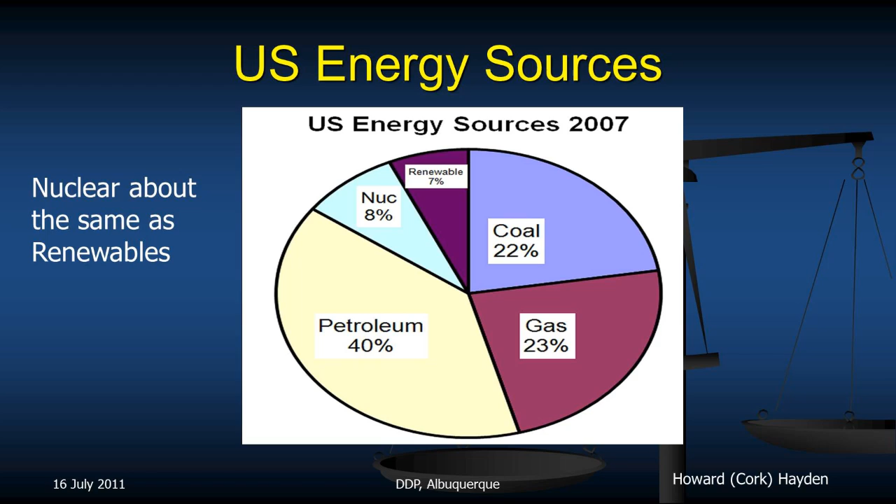This little laser reminds me of what Chris said yesterday. I have a word for you. It's called chromoergic psychosis. Chromoergic psychosis. It is the delusion that energy has a color, particularly green.

All right, here are our energy sources used in the U.S. And what you will notice here is that nuclear provides 8% of our energy. Now, this energy I'm talking about is the total energy used in the U.S., not just for electricity, but for running cars and everything else. Renewable energy is 7%. So you look at those, renewables about as big as nuclear.

And I'm going to use a comment from a book that I wrote that is now out of print called The Solar Fraud, which is that over 90% of our milk comes from cows and bears. Which is true.

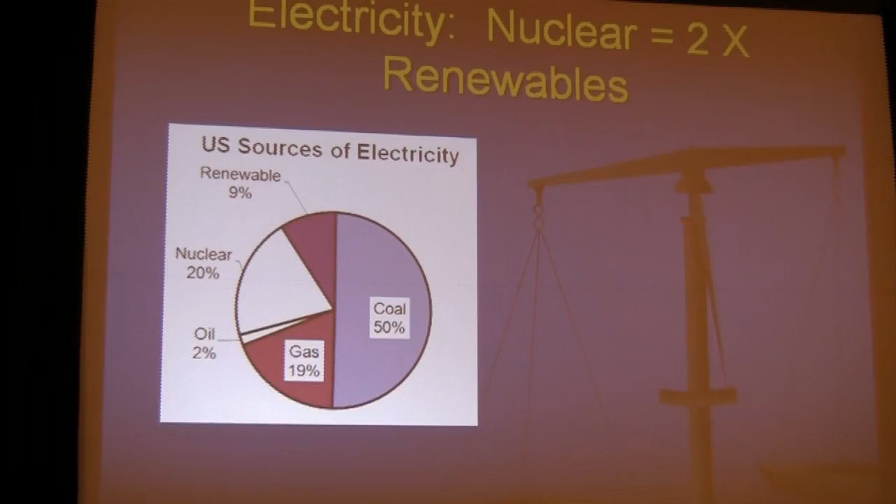So nuclear is about the same as renewables, but if I look at electricity alone, you see that nuclear is about 20% and the renewables are about 9%, so it looks like the nuclear is twice as important as renewables as producers of electricity. But wait, there's more.

If I take the electricity segment and divide it up and see what's there, this part in here is hydro, wood is biomass, bioliquids are biomass, and waste is mostly biomass. And so the upshot of it is, now wind is this fair-haired boy in here, and solar and PV are right there.

The electrical energy in 2009 in units of billion kilowatt hours: wind generated 70.8 out of a total of 3,953. In case you are interested in being able to chase down these numbers, you can get on the internet and go to the Energy Information Administration, EIA, which is the division of the Department of Energy, and they have a book called AER, the Annual Energy Review.

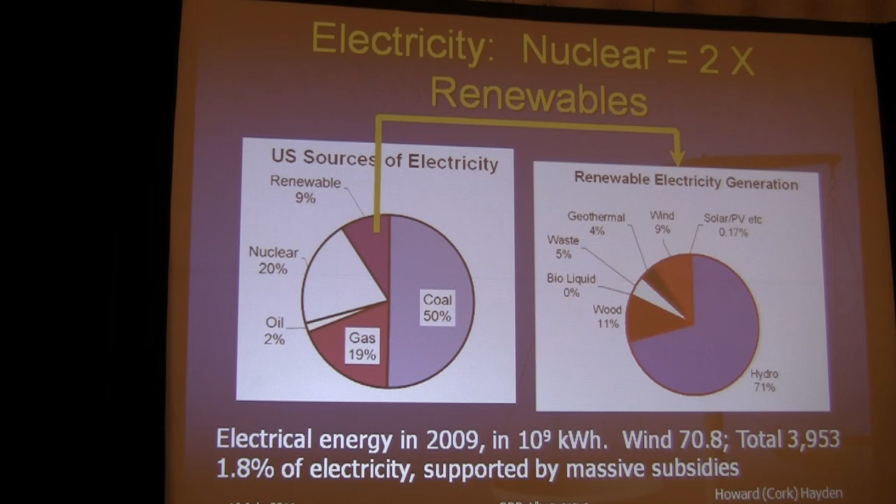And if you look up AER on their website, then you can get year by year a book which, if printed, is about an inch, 25.4 millimeters thick, about this big by about that big, to 12 significant figures. That's where you can find all this information here. So wind and solar will never replace serious energy sources.

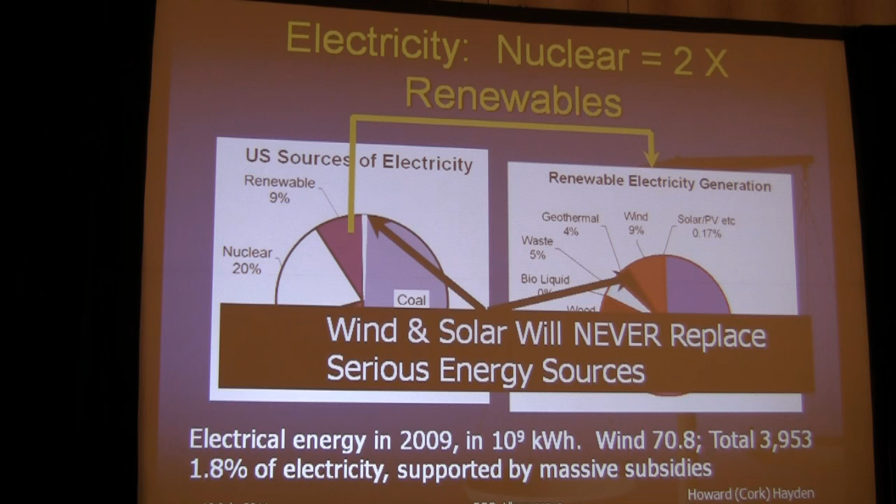I gave a talk some years ago out in San Diego, to a bunch of solar enthusiasts. It was a solar group. I don't know why they invited me. They should have known a little bit better. But a lady introduced it, and she pointed out how solar was abundant and it's everlasting and so forth. I got up to give my talk and said I heard a while ago that solar energy is everlasting. How come it gets dark at night? Believe it or not, they laughed too. But they were pushing, I want to tell you.

Okay, what I'm going to do is talk about the fair-haired boys. Nuclear, in units of billion kilowatt hours, in 2009, nuclear generated 799 billion kilowatt hours, wind generated 70.8, solar and PV together generated 0.8, and most of that is not photovoltaics. The overwhelming majority, like 90% of that energy, has come from the parabolic solar thermal electric units like they have down in the Mojave Desert.

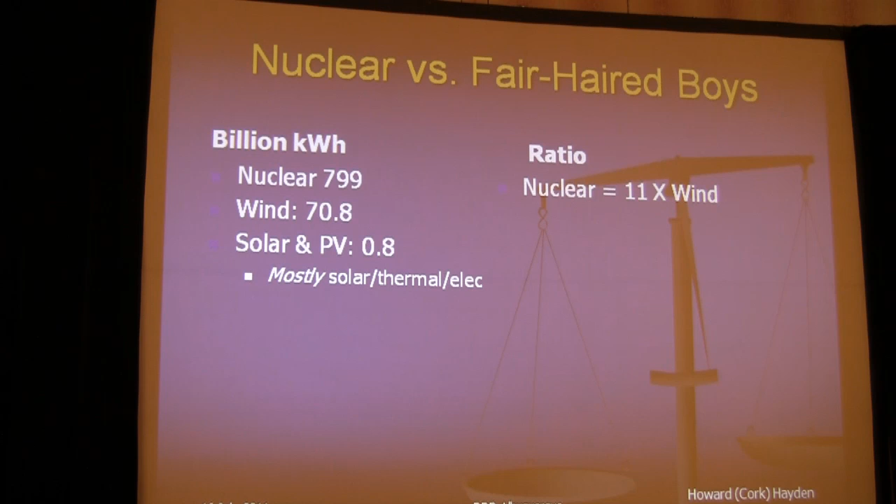In terms of ratio, nuclear produces 11 times as much energy as the wind has, and the wind has been vastly subsidized. And nuclear is 1,000 times the solar and the PV.

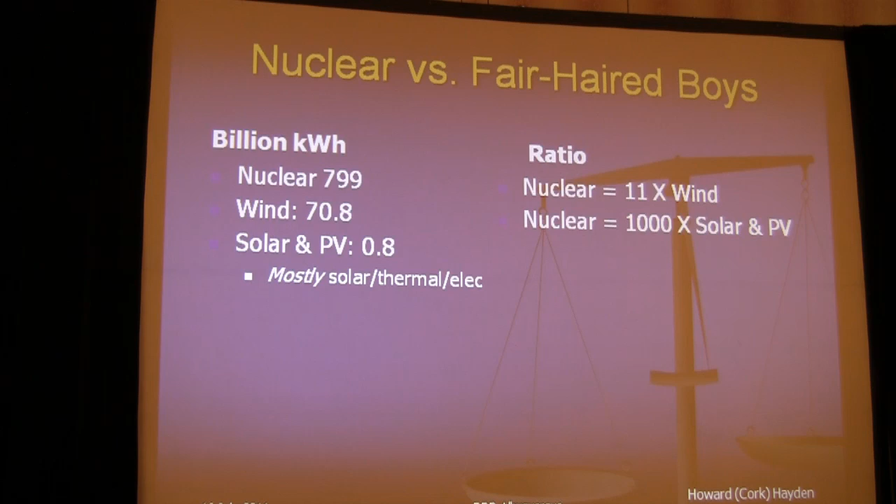Now, the reason that the factor is not up anywhere near 100% is because you're converting heat to work. So the second law of thermodynamics says you're going to have a little bit of trouble with that. But generally it has improved quite a bit, and the reason has entirely to do with the materials that can stand the higher temperatures.

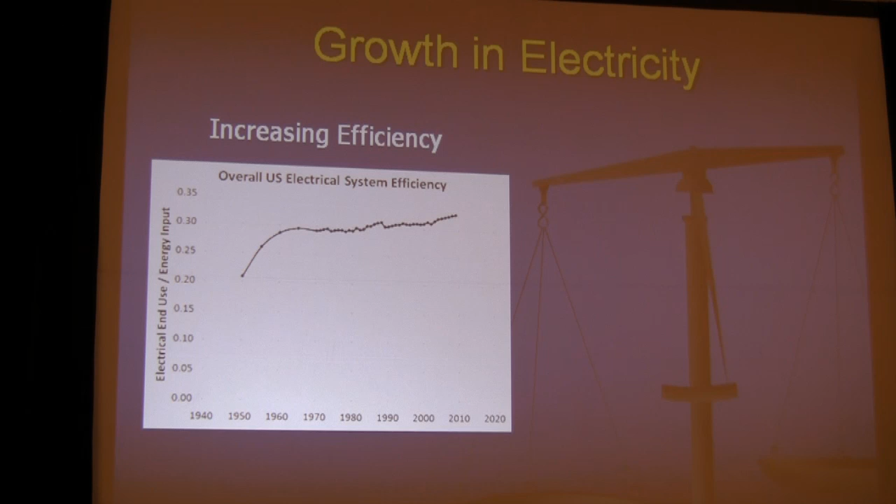We have this plot now since 1950 or so, of the energy input to electrical divided by our total energy use. And what we're doing is by now turning 40% of our raw energy into electricity. So the electrical fraction is growing like crazy.

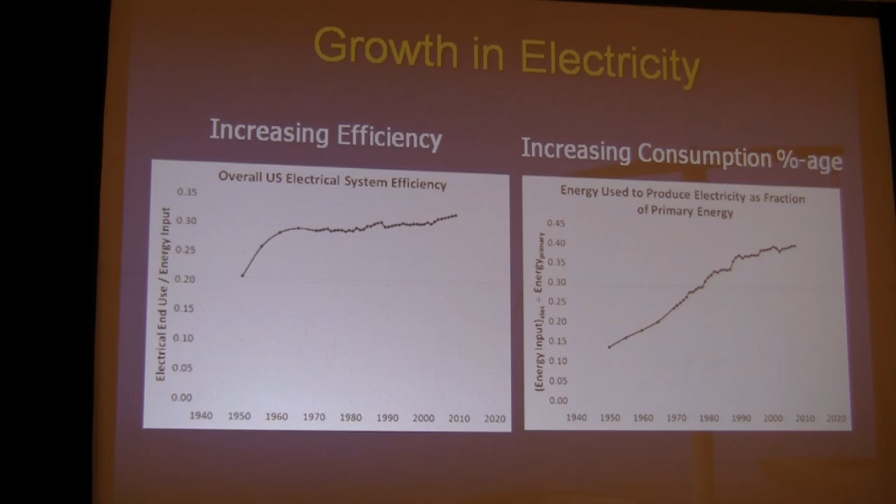Nuclear energy provides a fifth of our electricity. We have 104 reactors at the present time. They have an average capacity factor of about 90%. If you don't know what capacity factor means, it's like this. If you have a reactor that's producing all of its power 90% of the time, or 90% of its power all of the time, or 45% of its power 200% of the time, that's 90%.

We get no transportation energy, approximately, out of nuclear energy. There's not a lot of hope here. I mean, if we had electric cars, but they have to have some pretty good batteries using unobtanium, which is in fairly short supply. We are using electricity to power submarines and aircraft carriers, but that's not a large fraction of our total transportation.

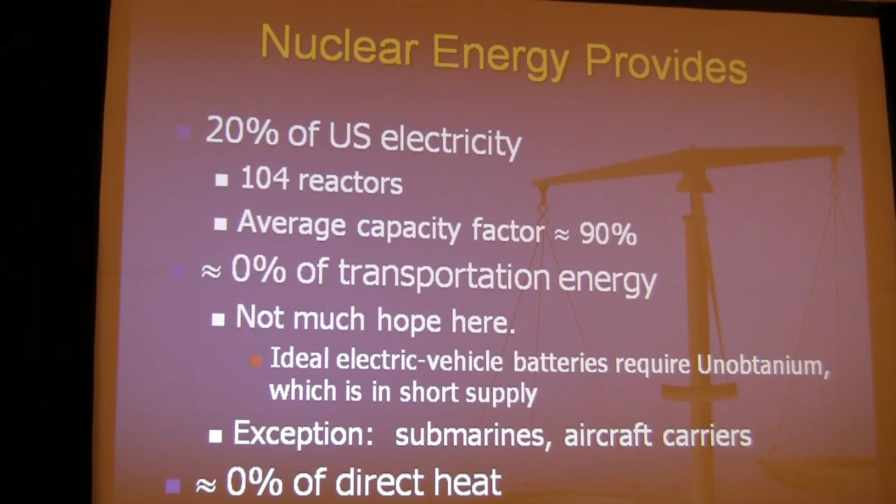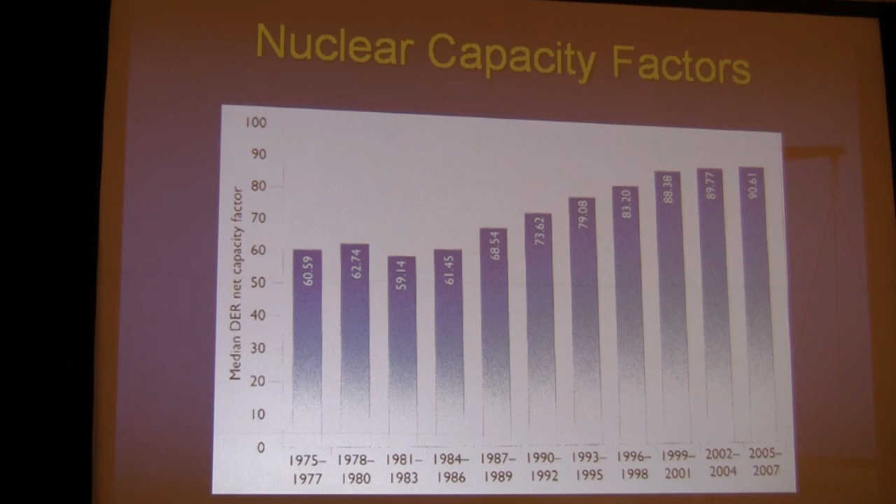We get no direct heat out of nuclear reactors, so they're really pretty good at producing electricity, but for reasons of safety and the length of the power cord, we're not using them for transportation or direct heat. Nuclear capacity factors have grown up from about 60% up to about 90%. Now that's averaged over the whole fleet of 104 reactors.

Wind farms by design have about a 35% capacity factor. In reality, 35% looks awfully good. They don't get that good, but that's the design. You can design the capacity factor of a wind turbine very easily. Let's say you have a child's pinwheel driving a 1 megawatt generator, you're going to have a capacity factor of 0.

If you have a 100-meter diameter fan turning a 1-watt generator, you're always going to have enough power to run that, so you have 100% capacity factor. So it's a question of designing the size of the turbine to the size of the generator that determines the capacity factor. That is, for any given site, it depends on the wind speed.

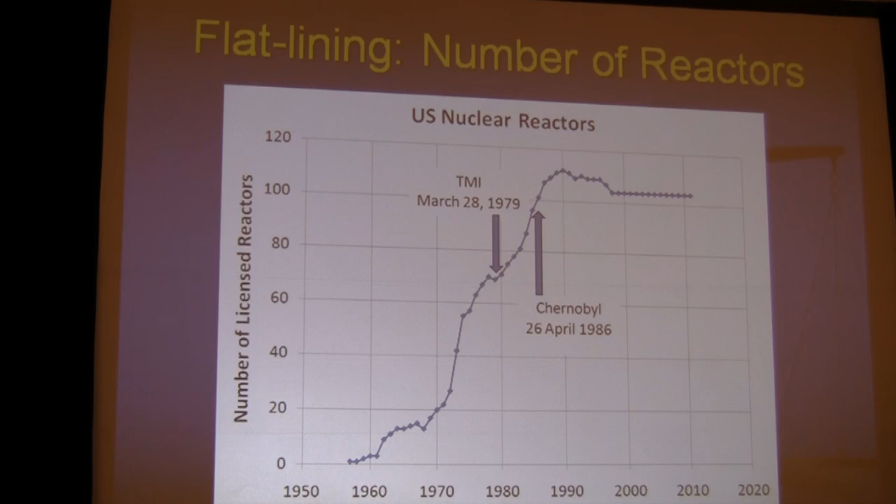Now, there is something for people who say, well, how are we going to decommission them? Well, we have some experience. We've already done that. And of course, there's all kinds of research reactors that have been decommissioned. The electrical production has gone up like this, and it's leveled off at about 800 billion kilowatt hours a year. My mistake, but it's your fault.

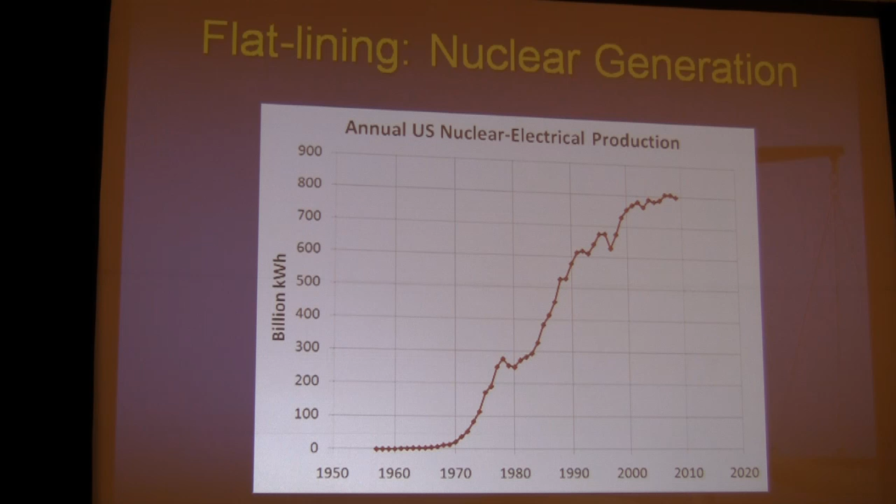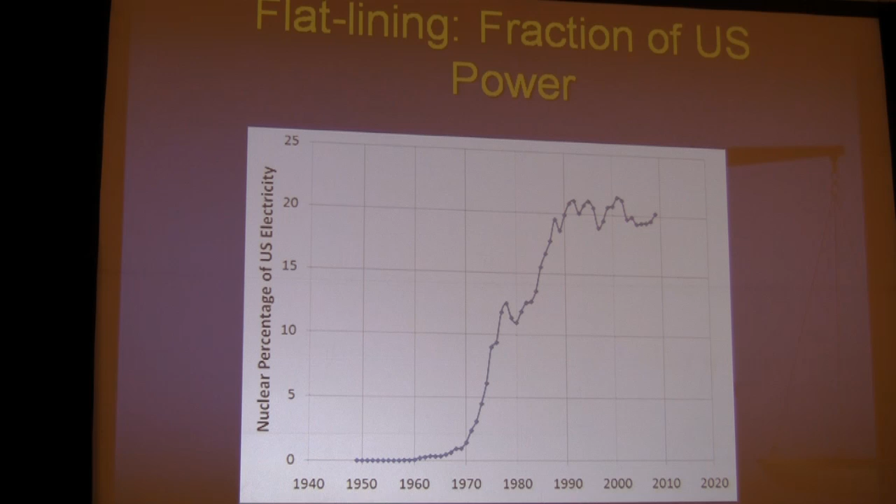As a fraction of U.S. power, it's more or less flatlining. But what's going to happen is that one of these days the economy will improve, the demand for electricity will grow, and we probably won't have more reactors to meet the demand, so that fraction will probably go down.

Nuclear power plants around the world: we have 104 reactors and 0 under construction. We have one that they're trying to revive the license for or something like that. They were going to build one in Texas. That was a Toshiba GE project, and they have decided evidently to can that for the time being.

Russia has 32 reactors going and 11 under construction. That means for every 3 operating, they've got 1 under construction. Worldwide, 438 operating, 65 under construction, so that's about 1 in 6. We have 0 out of 104.

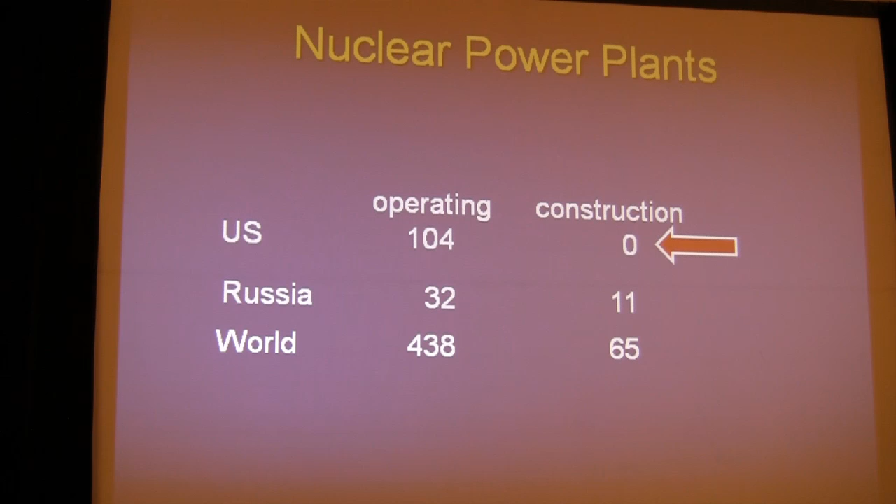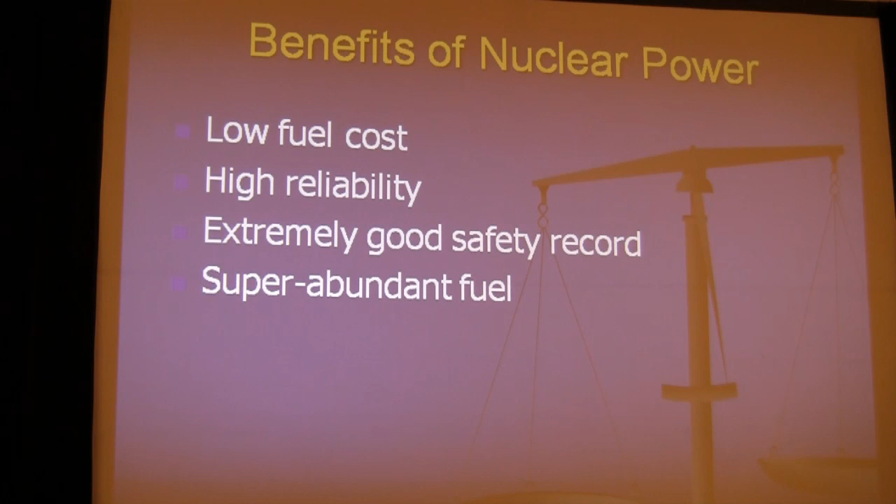Okay, benefits of nuclear power. You got low-cost fuel, high reliability, extremely good safety record, super abundant fuel. Those are pretty good arguments. So how come we're flatlining? Why aren't we building more reactors? It's not the technology and it's not fuel shortages.

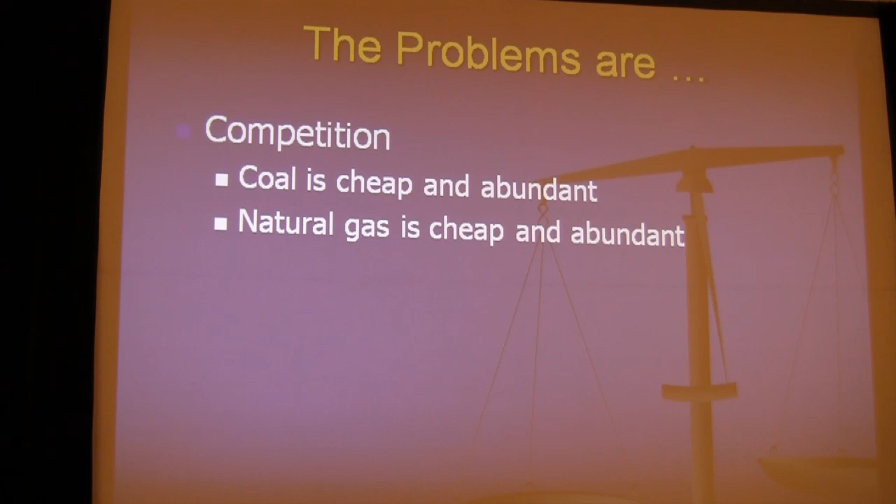One problem is competition, and that is that coal is cheap and abundant, natural gas is cheap and abundant. Both are more dangerous than nuclear by a considerable amount. But people don't think of the danger involved. They just think, my God, nuclear is very bad.

Fuel-fed plants are fairly rapidly built, and they're a lot cheaper to build than nukes. It's one of these things where you have a trade-off between initial cost and continuing costs. I remember when I was at the University of Connecticut, they had built the physics building, and in order to save money, they put in single-pane windows because, see, the building budget was one thing, and the maintenance and fuel and heating budget was quite another.

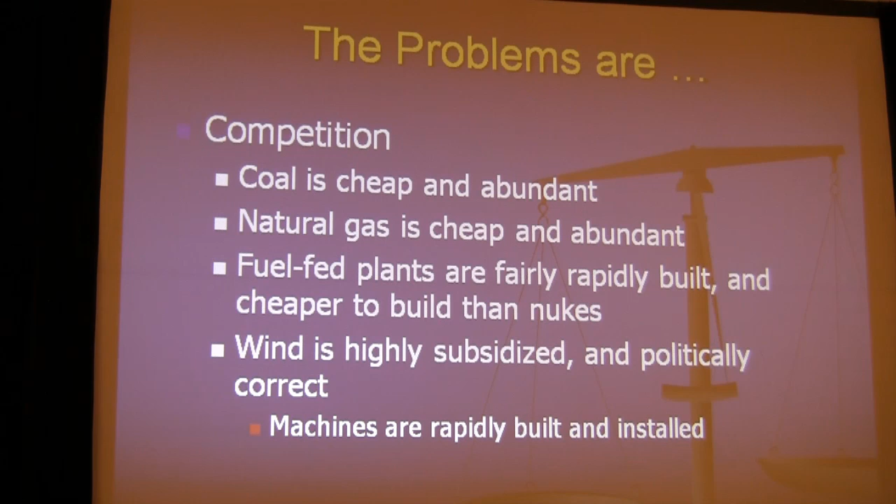So they went cheap on it. Wasn't too smart. Wind is highly subsidized and politically correct, and the machines are fairly rapid to build. You're only building 1 megawatt or 2 megawatt electrical generators and so forth, and you've got factories turning out blades. Pueblo has a factory turning out the towers for the Vestas units, which I think is really kind of bad. One of these days that wind thing will blow over and those talented people will be out of a job.

A lot of competition is coming from the gas combined cycle unit. Now, I don't know if you know how these things work, but you have a gas turbine running an electrical generator. Now, that gas turbine is not appreciably different from the one that flew you here. Well, I've actually got a piston engine that brought me here,

but anyway, what they have done is they have used gas turbines with very, very high temperature resistant materials. Sometimes they make the blades out of single crystal titanium, and sometimes they make them out of some sort of steel with a ceramic coating and so forth. But they can take very high temperatures. The exhaust comes out at high temperature. Now, in some cases, they will add in some natural gas reheat, but then this heat is used to boil water to run a steam turbine.

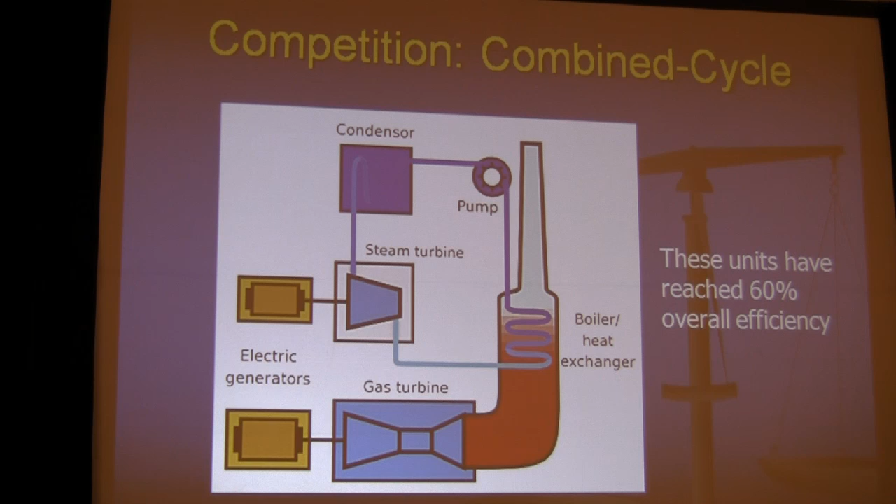So it's a combined cycle, so you have a generator here and a generator here, and they have actually reached overall something like 60% efficiency. So that means you're squeezing a lot more electricity out of your natural gas than you were able to get before. The huge problem against nuclear has, Jay, are you here? Fear.

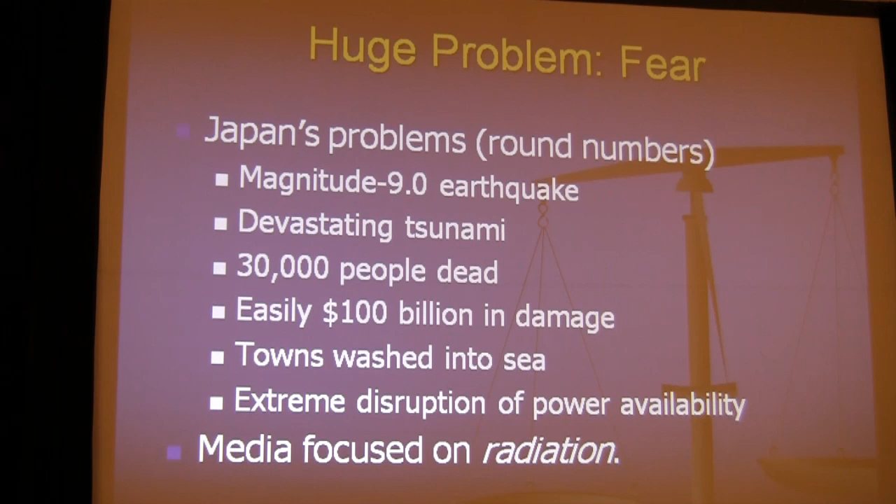So here we have Japan's problems in round numbers. They had a magnitude 9 earthquake. They had a devastating tsunami. I think it was 30,000 people now considered dead. I don't know if that's the exact number, but whatever it is, a great large number. They've had at least $100 billion in damage. They've had towns washed into the sea. And they've had an extreme disruption of the power availability, which has cut down the ability to manufacture parts for automobiles and things like that. So what did the media focus on? Radiation. All right.

Probably most of you are not into making horror films, but if you make a horror film, the thing that is most horrible and frightening is the monster that's skulking around in the dark and you can barely see him. Because if they bring the monster out where you can see it, that's pretty natural. Well, there's a problem. You see, you can't see radiation. And that is one of the very frightening things to a lot of people. It's dangerous and they can't see it.

And Fukushima Daiichi has released radioiodine. Take potassium iodide pills. Unfortunately, Bobby has stolen my thunder. Isn't potassium-40 radioactive? I mean, this was also silly because there was so very little iodine-131 that would arrive in the U.S., and to take on the other hazard of potassium iodide pills. It isn't, mind you, the radioactivity in the potassium iodide pills. It's the potassium iodide that is not particularly safe for you.

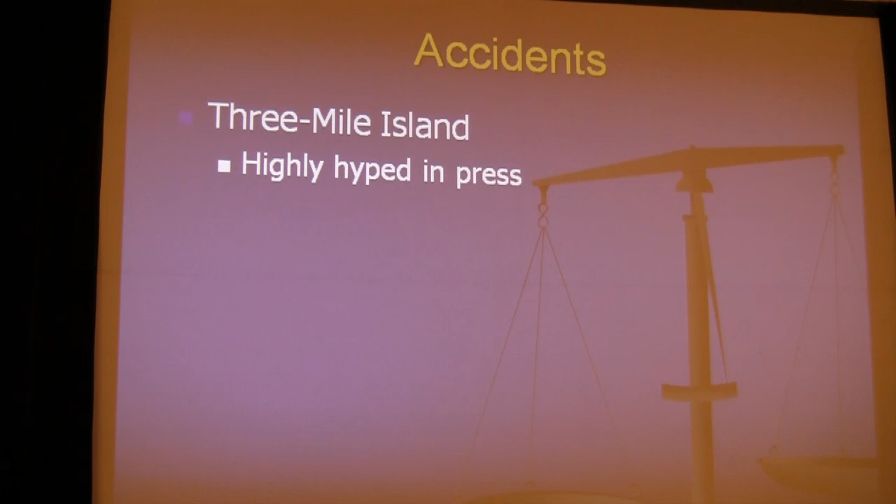Okay, there have been some accidents. Three Mile Island, which was highly hyped in the press, nobody got hurt. Chernobyl, and most of the core was released in a graphite fire. Fukushima Daiichi and Daini.

Dai means number, and ichi means 1. Dai-ni, that's number 1, number 2. Ichi, Ni, San, Sayonara. You've used up my entire Japanese vocabulary.

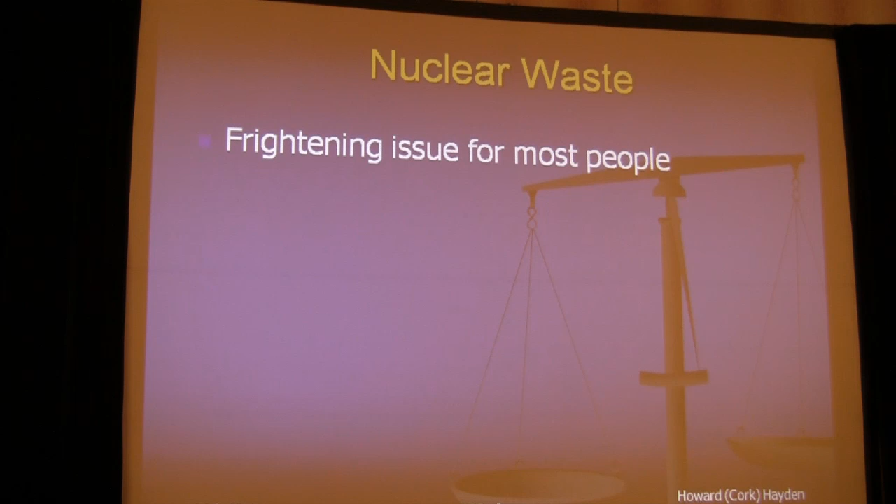But tsunami, okay. There's a radiation release from there too. Towns were evacuated. Now, another reason for fear is nuclear waste, and it's a frightening issue for a lot of people. Yeah, but what do you do with the waste? You know, as if no one had ever thought of that. Engineers aren't very smart, I guess, right?

Some take-home messages for you to understand. A gigawatt year, that means if you have a power plant producing 1 billion watts of electricity around the clock for a year. Now that's enough to do everything that's used in a town of 700,000 people. You generate 1 metric ton of actual waste. You got any idea how big a metric ton is? It would easily fit under this table. Well, it would fit under about in here. It's less than a cubic meter because a cubic meter of water has a weight of a metric ton. And this is denser than that.

The same electricity from coal uses 1 billion pounds of coal. A figure for you to remember is that in a good power plant, 1 pound of coal produces 1 kilowatt hour of electricity. Another thing to remember is that the activity, number of radioactive events per second, is inversely proportional to the half-life. The longer the half-life, the lower the activity. Okay, the higher the activity, the less long the stuff lasts.

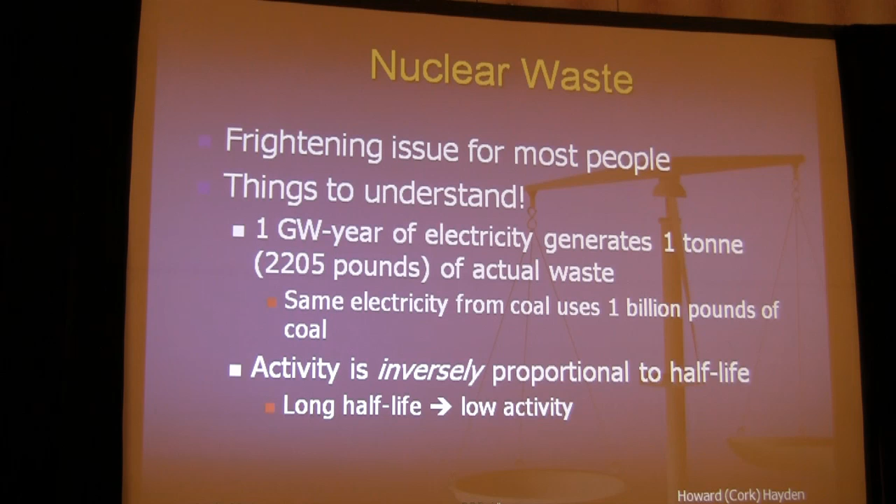And that means if it has a half-life of 1 minute, you don't worry about it at all because that radiation isn't going to get to you. If it has a half-life of millions of years, well, it's not very radioactive. The bad stuff is the stuff that has a radioactive half-life of around 30, 50 years, something like that. There's 2 of those.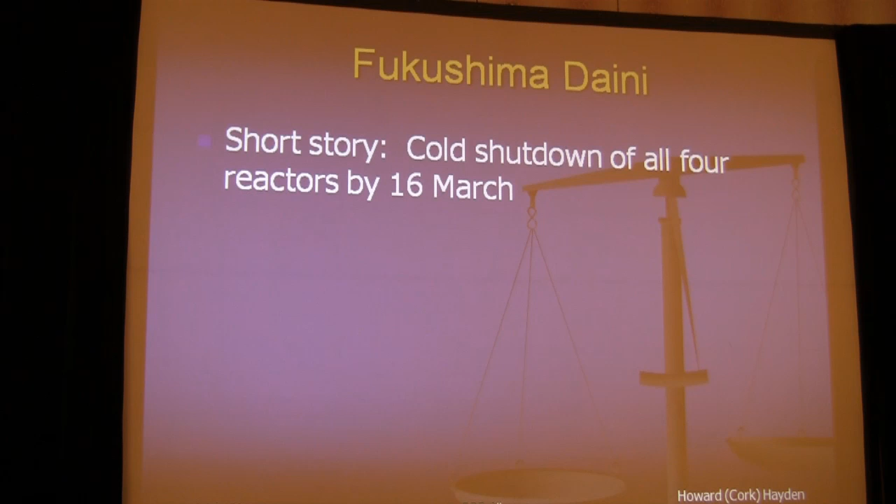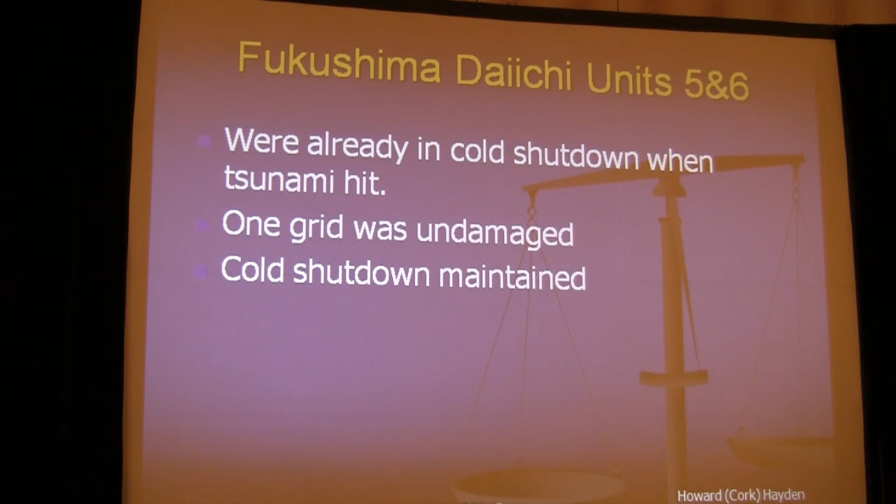I'm going to talk about Daini first. The short story is they had a cold shutdown for all reactors on March 16th. One of the incoming grids was undamaged, so they were able to get all the power they needed to go through the cold shutdown, and they have maintained it ever since. Now, Daini is south of Daiichi, and they were maybe a little bit higher in elevation. Anyway, the tsunami was not as bad there.

And here are some lessons that might have been learned. You always wonder if things have, in fact, been learned - if you've taught a course, you wonder if anybody learned anything.

Before we get on with this, here's an interesting question. Do you know what profession exposes its workers to the highest levels of radiation? International airlines. A lot of people get that. What exposes you to the least? Nuclear submarines, yes. These guys are under the water for a long time in a low radiation environment, and Bobby, that might be the group you want to study. They're shielded from everything except the reactor, and if Ted Rockwell were here, he'd tell you about how much radiation they actually get, but it isn't much.

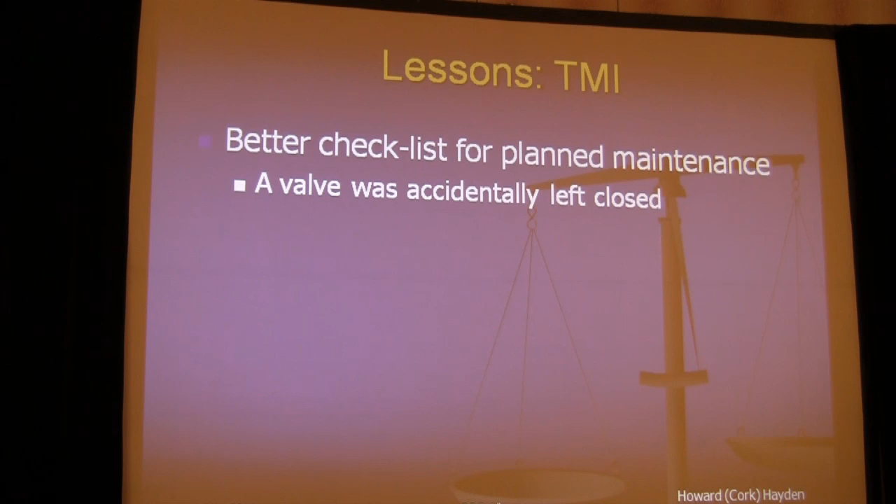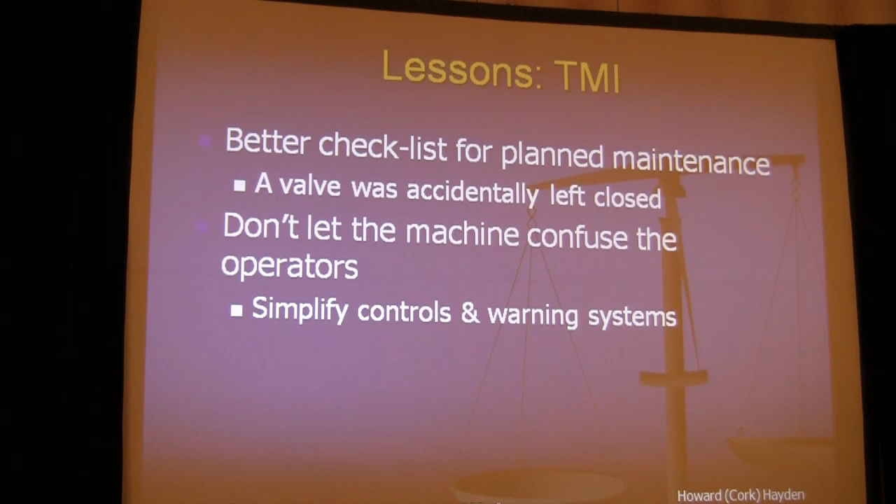Anyway, for TMI, they needed a better checklist. When you flew here, your pilot had a checklist, and he went through various things to make sure your plane was ready to fly. But at TMI, they left a valve accidentally closed, and then things went bad - bing, bang, noise, klaxons, and everything else. They didn't know what to do because there was just noise all over the place, and they had contradictory information to deal with. But no one was hurt from it.

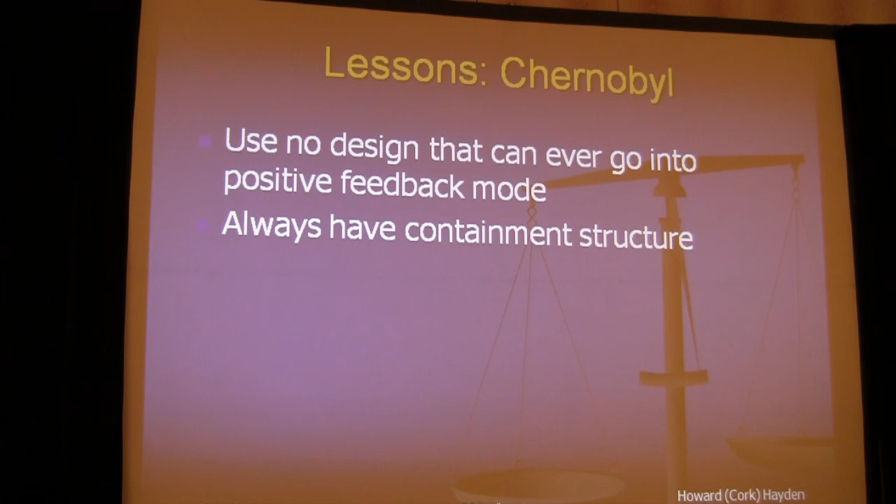Chernobyl was a different thing. They used a design that had been rejected in the US many, many years ago, back in the 50s. But as Petr Beckmann said, the Russians thought it was easier to make more Russians than all that concrete. They didn't have a containment structure, and the operators were playing around. They got into this positive feedback mode, and it went from 0.01% of full power up to 200% of full power in a matter of something like seconds. It went like gangbusters - exponential growth on steroids.

And they weren't honest with the public, and that was a place where potassium iodide would have done a lot of good. And it's important to understand - people talk about Chernobyl as a horrible thing, and it was a horrible thing, but it was about as close as you can get to the worst possible accident.

I remember back in the old days, you'd talk to people - well, what's the worst thing that can happen in a nuclear reactor? And I'd turn around and say, well, what's the worst you can imagine for an airplane accident? And they'd say, well, you got a big plane load of people that crashes in the Mojave Desert and kills everybody. No - how about two such planes colliding over New York? One falls into Shea Stadium where people are watching a baseball game and incinerates all those people. The other falls into Yankee Stadium and incinerates those people.

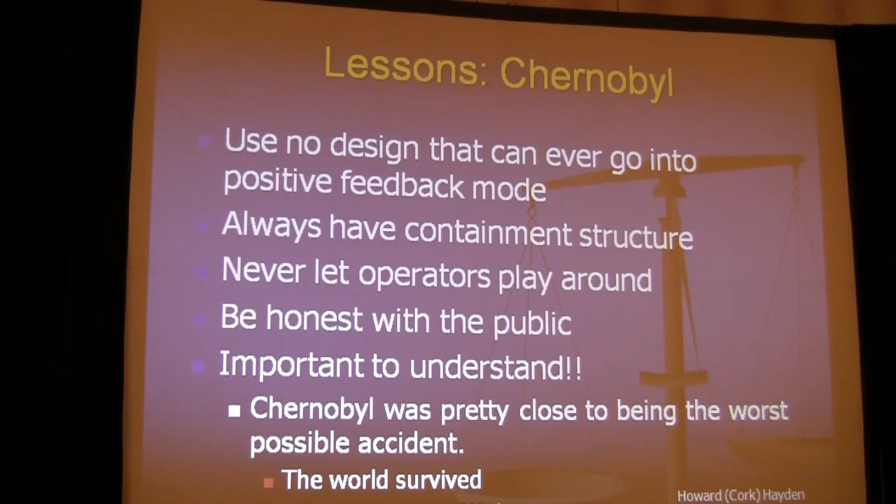So we have some lessons from Fukushima, and this is the first lesson. You see that thing right there? Anybody here read Chinese? It's about like trying to read a gravestone, or the Japanese - like trying to read an ancient gravestone. You have to go up there and do rubbings on it or something like that. But these tsunami stones tell you: don't build below this level, because the tsunami has reached there.

This was an article in the New York Times, 21 April. It warns residents not to build homes below it. Hundreds of these tsunami stones, some more than six centuries old, dot the coast of Japan. So the lesson is, listen to your mama.

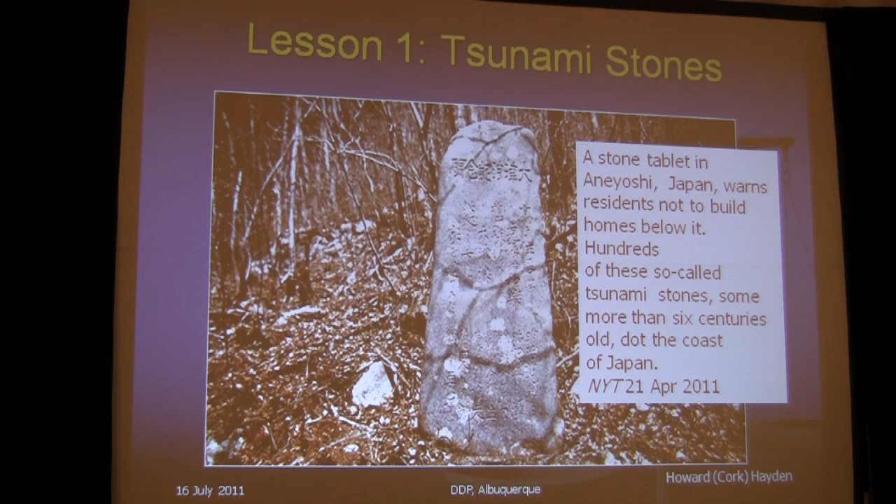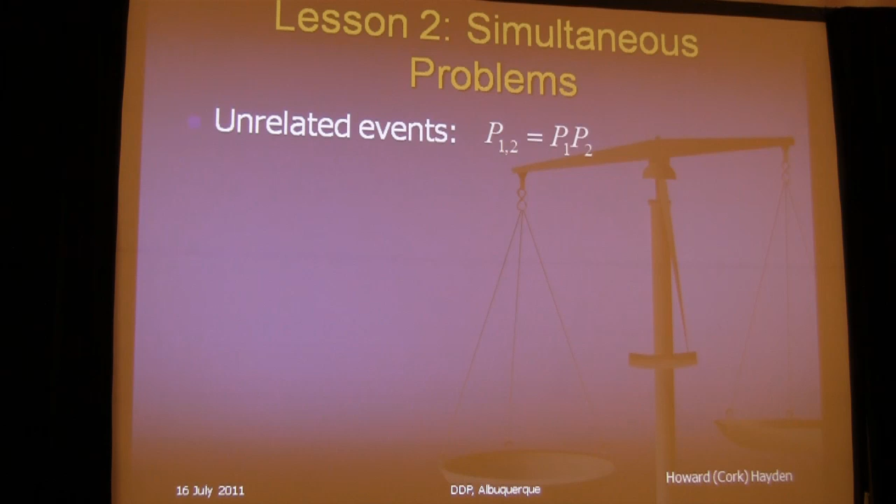Another lesson is easily understood. If you have unrelated events, the probability of one thing going bad and a second thing going bad at the same time equals the product of their probabilities. So if each event has one chance in 1,000 per year, there's one chance in 1,000,000 they occur simultaneously. But if the events are related, so that A causes B and C, then the probability that they both occur is about equal to the probability that either one occurs. And one chance in 1,000,000 is a whole lot different from one chance in 1,000.

But all of these problems, with the possible exception of one I'll discuss later, came from the lack of power. If they had had power, there'd be no problem.

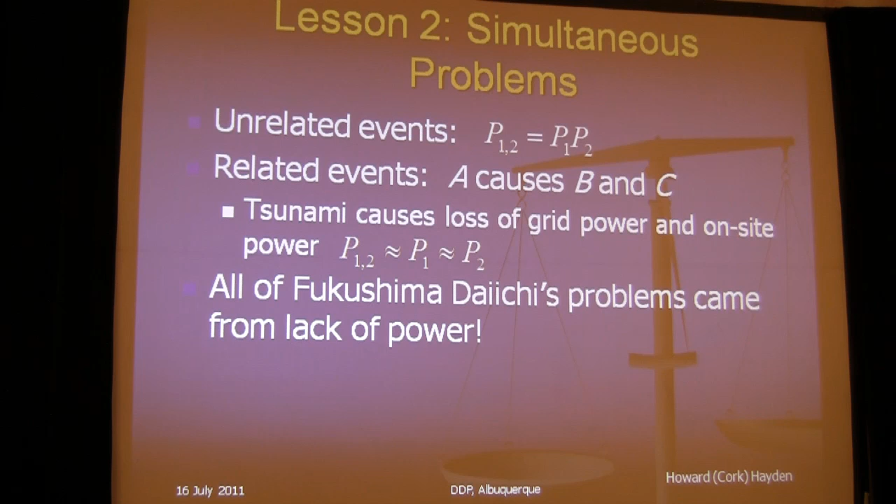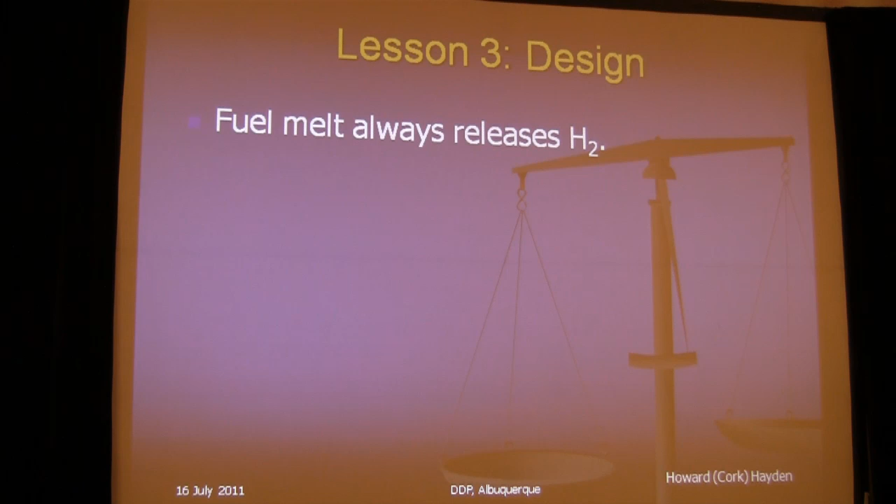The design: a fuel melt always releases hydrogen. If it gets hot enough, the zirconium cladding burns in the water atmosphere, producing hydrogen. You get zirconium oxide or dioxide, and it releases hydrogen. And the hydrogen has to be able to vent without any possibility of explosion.

Millstone Unit 1 was a boiling water reactor, and they had a hydrogen explosion. They had a big pipe going out and a big chimney to vent radioactive gases, but some hydrogen got in there from something that happened, and it blew a door off. Blowing a door off is a whole lot different from what they had there, but that's what happens when you have hydrogen. Hydrogen has the largest range of flammability of all fuels, anywhere between 4% and 75% in air, and it'll burn. So it's not at all like gasoline.

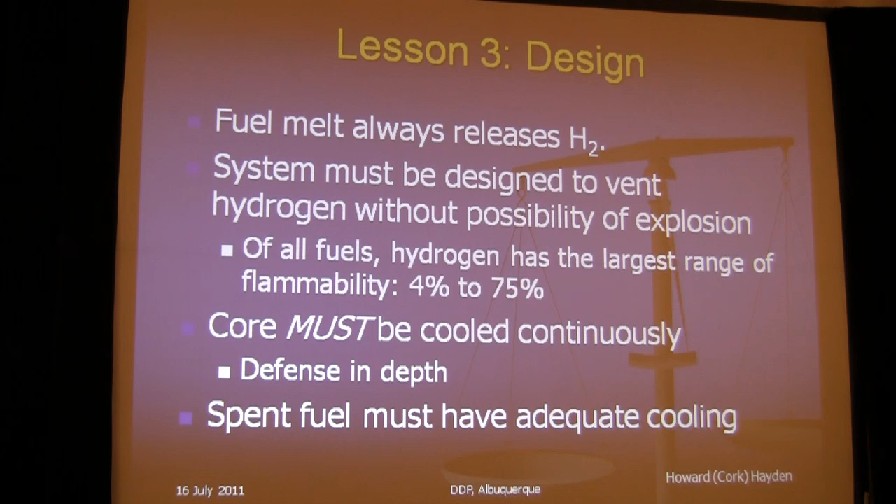You could never have a gas gauge, a float gauge, in your gasoline tank if it were anything like hydrogen. The core has to be cooled continuously, and you have to have defense in depth—a defense against this thing going wrong, that thing going wrong, and so forth. The spent fuel must also have adequate cooling.

So here's a little series of slides. I've only shown you a few from what happened at Fukushima Daiichi.

And if this looks a little disjointed, I remind you of one of my classmates in high school. Some girl was typing up a paper at something like 2 in the morning. When you type a paper like that, if you have a long quotation, you indent and single space, then when you go back to regular text, you de-indent and double space. Well, she forgot to do that—she de-indented but forgot to double space. So at 2 in the morning, she got this bright idea to fix it: she got out her eraser and erased every other line. So if this sounds disjointed, it's not the whole story—I've erased every other line.

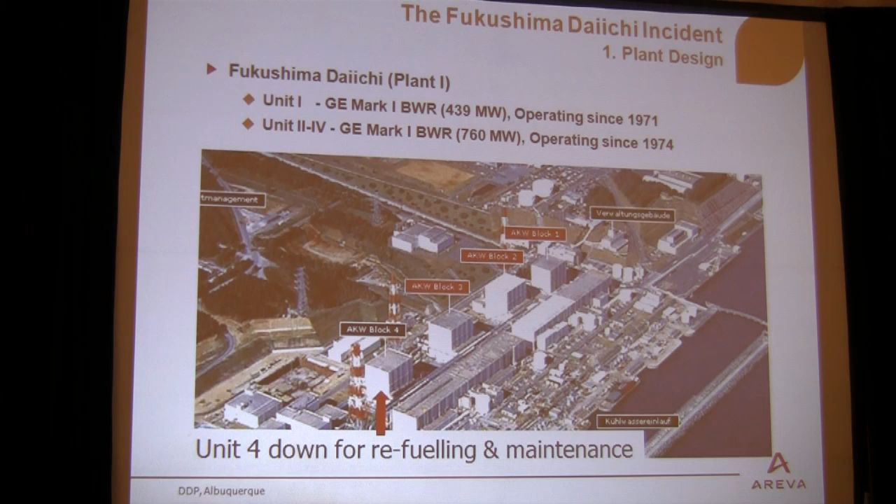Here is an aerial view, and this is off to the north right over here. Units 5 and 6 are sitting over here, and they were not damaged. Daini is down the coast, down this way, to the south.

This series of slides is from Areva, and you'll recognize—right, you can't read that, but it says Kühlwassereinlauf, that's a cool water inlet, okay? But anyway, there's units 1, 2, 3, and 4 in their un-blown-up condition.

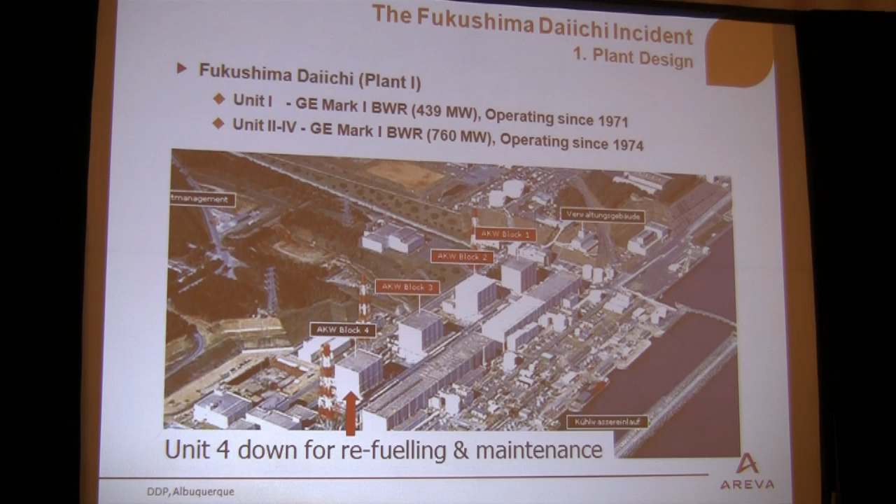Now, unit 4 was down for refueling and maintenance, and because of that the spent fuel pool had the whole fuel load in it. And the freshest fuel is the hottest, so that's where the problem came from with the spent fuel.

Here is a section view and a reality view, an artist's conception, so to speak, of what it looks like in reality. You have this thing called a wet well around here, and a dry well in there—okay, that's the dry well. Now this one is the containment structure right in there, the primary containment structure, and it fits rather closely around the reactor.

The reason for that is, let's say you want to sustain a certain pressure, you want it to withstand a certain pressure: if you double the diameter, you have to double the thickness of the wall. You've got an oxygen tank with a steel wall about this thick, all right, it'll hold oxygen at, say, 3,000 PSI. But you can run it through a little tube this diameter that's nowhere near the thickness of the wall of the big tank. It's just because—well, we talk about that in freshman physics—it's one of these scaling laws where you have to double the wall thickness when you double the diameter.

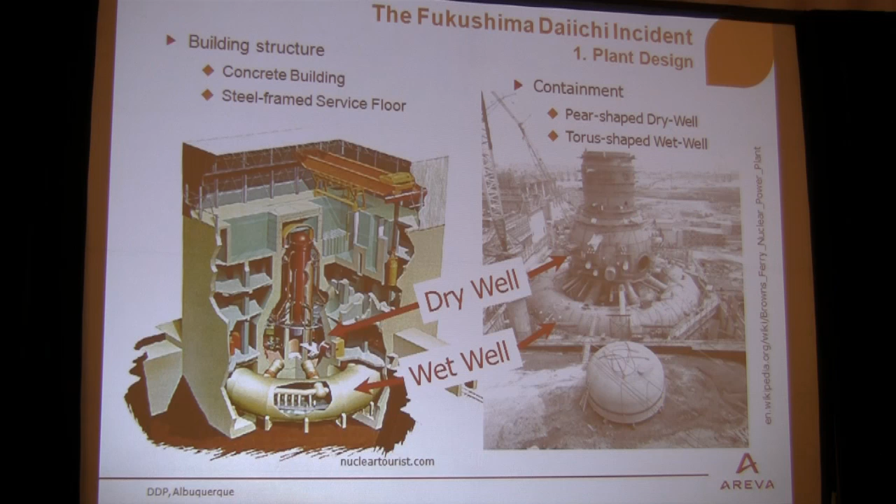All right, here is a sort of view of the way it ought to work. This is a better drawing to look at here.

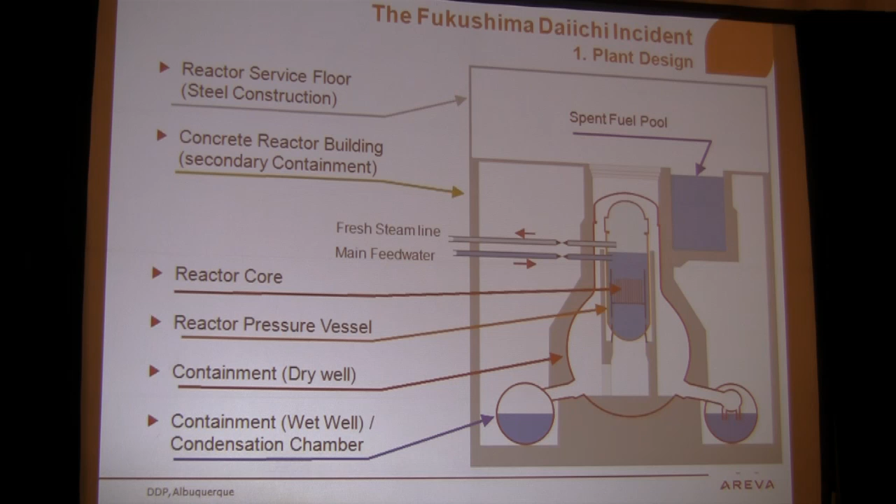Your main feed water comes in here and steam goes out there to your turbine. That's the way it ought to work. This is your reactor core. This is the pressure vessel, the steel vessel. There's a bunch of bolts up here to hold the lid on. You have the containment that looks around like this, and this containment's got a lid on it. You have access to this wet well, which is a condensation chamber, and this part in here is called the dry well. Okay, that's normal.

Now, what happened was the tsunami hit the plant, and it was designed to withstand a tsunami of 6.5 meters, but they got one 7 meters. Now, half a meter is only this extra height, but that allowed a whole lot of water to get in and caused a lot of damage.

By the way, there were a couple of people killed. One of them was at Daini, and he was running a crane. And the other one was a worker that was in one of these buildings down in the basement, and he got killed by the flood.

Anyway, the flood came in, and you flooded the diesel generators and everything else, the batteries, and well, I guess the batteries are pretty safe, but you had some electricity from the batteries for a while. But the thing is that the tsunami wiped out the incoming power lines so that they couldn't run their coolant pumps and everything else. So only the batteries were available.

Now, one of the drawings that I do not have here is that there was a secondary process where you could use steam from this to run a pump that would run it through some cooling and over to a cooling area, and that worked for a while.

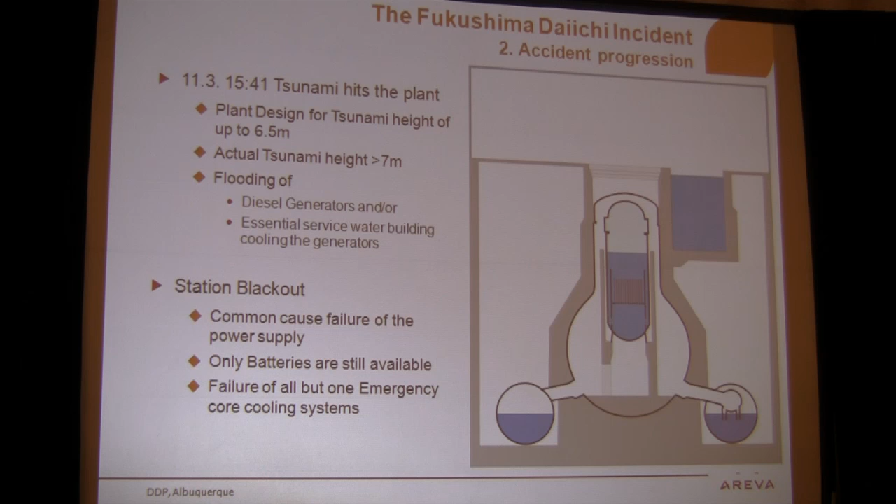But here is sort of the progression of events now. Instead of having the steam go out to the steam generator, you have the steam come down here to this wet well where it condenses. Well, that's fine. It condenses, but it warms up. And the warmer it gets, the less ability it has to condense, and eventually you're up to the boiling point and you can't condense anymore, and that means you're going to get a steam buildup. So that's sort of what happened.

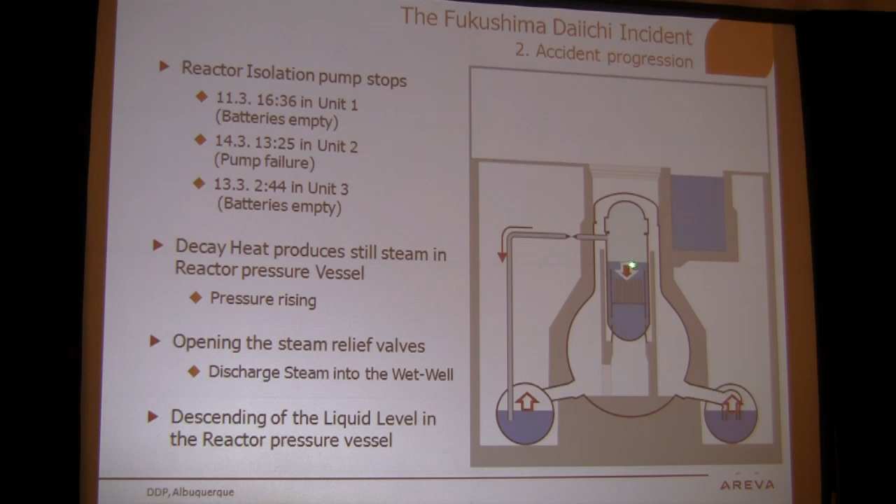But at the same time, you're losing water in here, you're gaining some water in there. When the water level goes down in here, you've exposed the fuel rods, and with half the core exposed, you get no significant core damage, even though it's warmed up. These metals can take fairly high temperatures and so forth. You get two-thirds of the core exposed, and you're getting up to 900 degrees C core temperature, cladding temperature, and that's getting a little bit hot, and it'll balloon and it'll break the cladding.

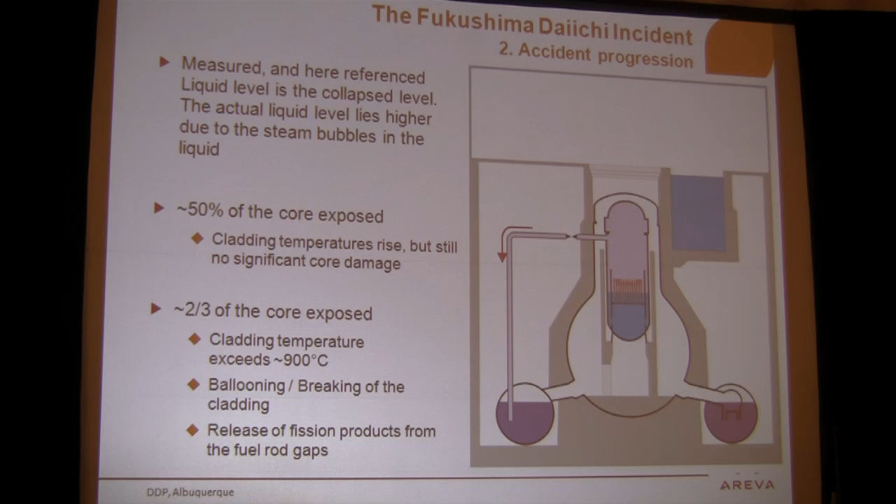And you release some fission products. Now, we know there were fission products released because there were things like iodine-131. Now, iodine-131 does not come from, say, neutron activation, where neutrons have gotten through the wall and escaped and irradiated stuff that's around your building. It has come from the core. So you knew there was some core damage here and there, you just didn't quite know where.

With three-quarters of the core exposed, you get 1200 C temperature, and you get this reaction in here where zirconium reacts with water and produces zirconium dioxide and hydrogen. So the hydrogen then comes down in here, it goes in there, bubbles up here, and now you have hydrogen in the wet well, or in the dry well too.

At 1800 C, you get melting of the cladding. At 2500 C, you break the rods and so forth.

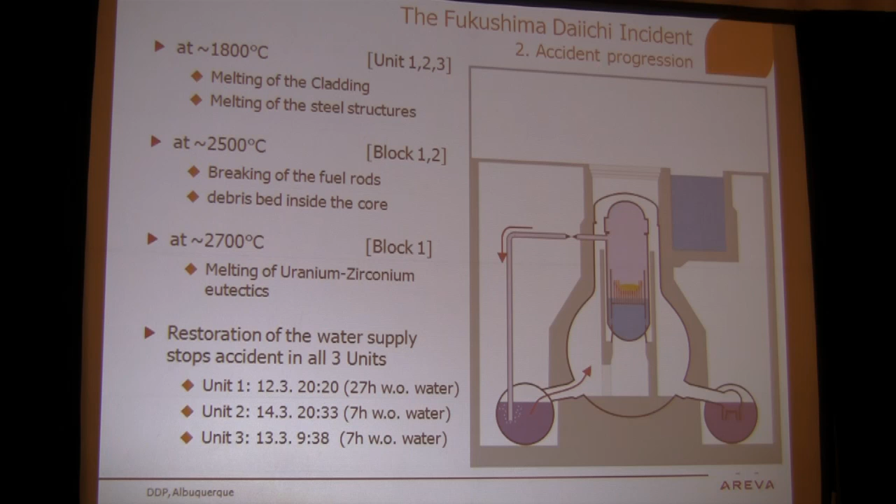Anyway, at Unit 1, after 27 hours without water, they got restoration of the water supply. They used seawater. Now, seawater is going to ruin their reactor. Guess what? It's already ruined. Use seawater, okay? After 7 hours, they got Unit 2 watered up and Unit 3 watered up. They didn't have to do that to Unit 4 because Unit 4 was down for refueling. There's no problem. Except they had a little bit of problem.

Now, the hydrogen that was here in the dry well had an escape route, and it went up there, but it exploded and blew the lid of the building off like that. Destroyed the steel roof and so forth. It was spectacular, but minor safety relevant, which is translated from German as of little relevance to safety, if we're straight English.

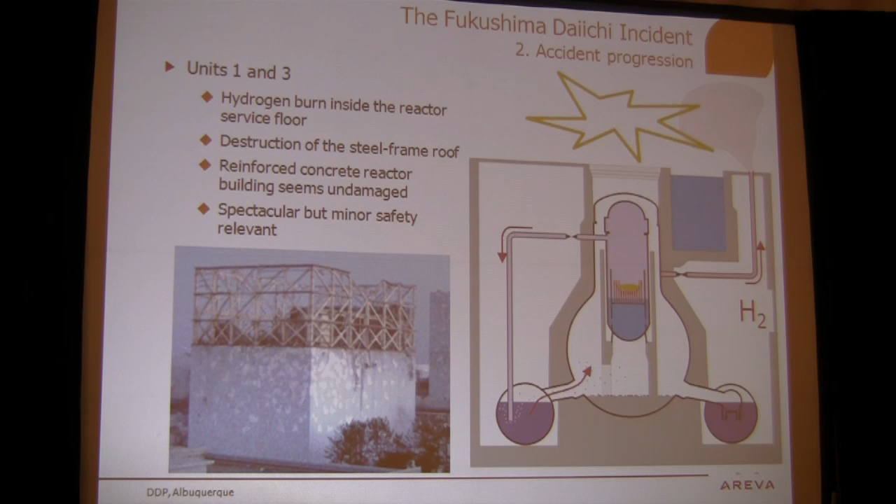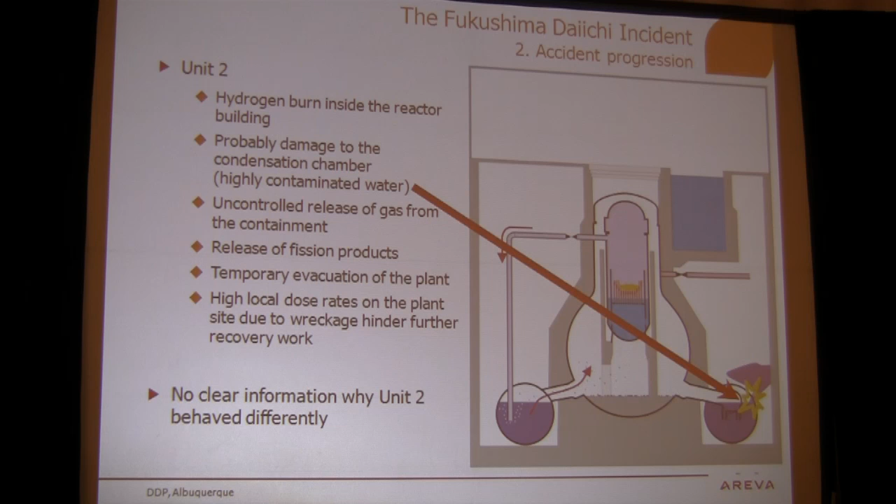Okay, now in Unit 2, they had another problem, and evidently there was a break in this wet well down in here, and that allowed some stuff to escape. There's no information why Unit 2 behaved differently from the other units. I think the answer is probably that the earthquake did a little fracturing there, because there's actually a hole in here, which they discovered, and I think they managed to get in there with some kind of robotic stuff and patch it up. That's not a good place for humans to be.

So the current status of reactors is you have core damage in units 1, 2, and 3, building damage in all of those. Reactor pressure vessels were flooded in all units with mobile pumps, and the containment in Unit 1 was flooded.

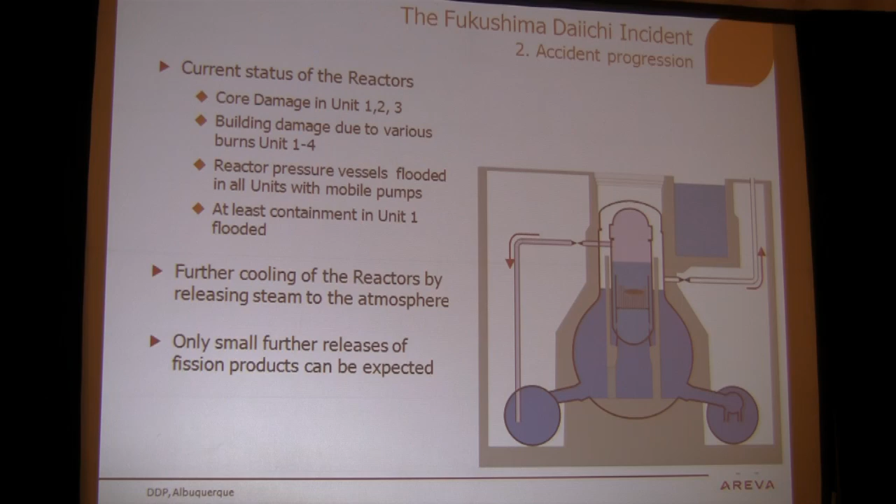These are not pumps that are taking heat out to a heat exchanger and so forth. Basically you're pumping in water and letting steam go out to the atmosphere. That's how the cooling is taking place. But they don't expect a lot of fission products to be sent out now.

Reminder on exposures. There is no instrument that measures dose, which is energy per unit mass in rads or grays. A rad is an old unit, which is 100 ergs of energy per gram of tissue. A gray is a joule of energy per kilogram of tissue.

There's no instrument that measures dose equivalent in rems or sieverts. Rems being rads multiplied by the Booger factor, which is 1 for 100 keV radiation, and grays, sieverts related to grays by the same Booger factor. And so in the following slides, which are very often expressed in sieverts, they are all inferred, and they are not exposures, they are what-if exposures. In other words, what if you had a person there? And they're inferred from the kind of radiation, which is alpha, beta, gamma, neutrons, the energy of it, and the amount of flux.

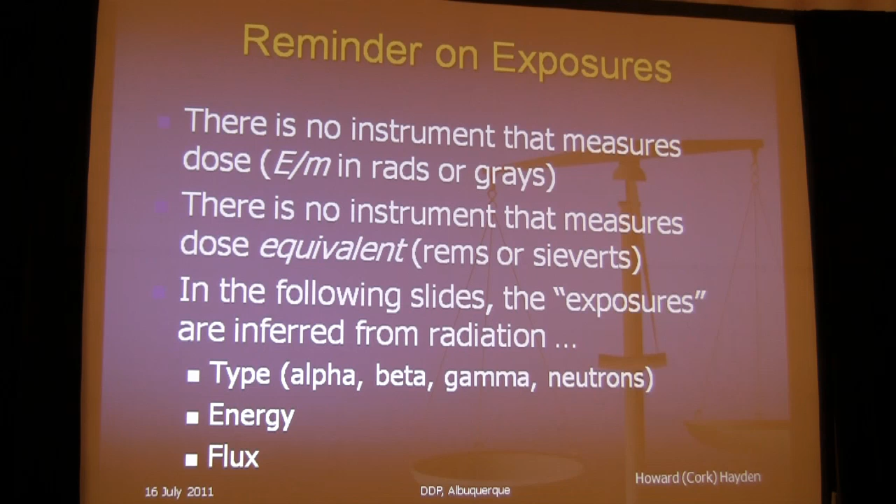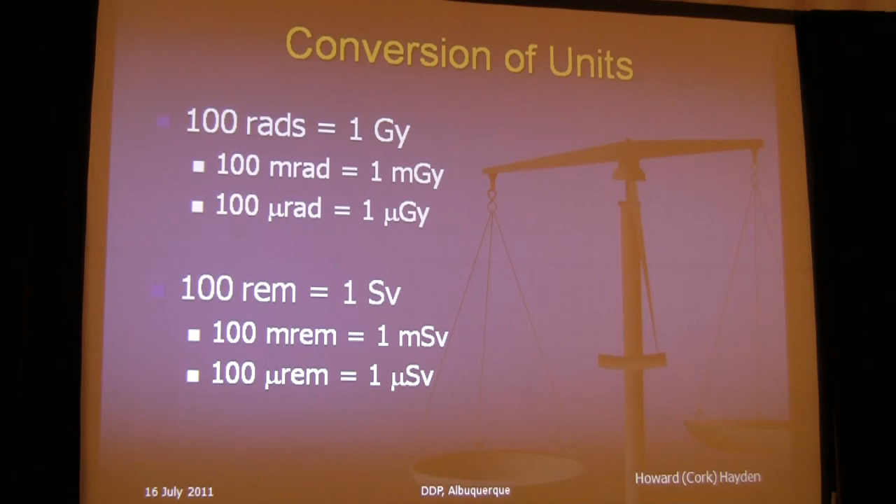Now, for those of you who are rem people, or rad people: 100 rads is a gray, 100 millirads is a milligray, 100 microrads is a microgray, 100 rems is a sievert, 100 millirems is a millisievert, 100 microrems is a microsievert. So when you see one of these units expressed in milli or micro or something like that, multiply by 100 and you've got the milli or micro expressed in your favorite rems and rads.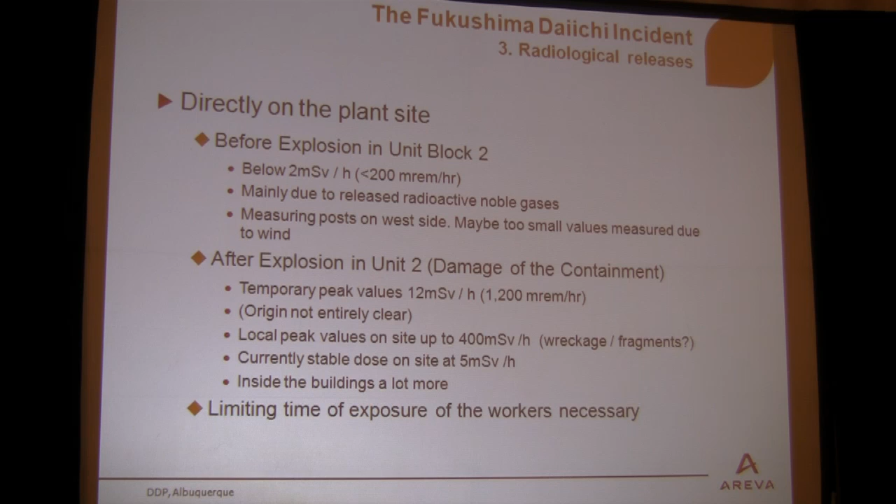So the background level before the explosion was around 2 millisieverts per hour, which is around 200 millirems per hour. After the explosion, it went up by a factor of about 6, right there. That was the explosion of the building from the hydrogen and so forth. And that's a lot of radiation. You don't want to be in that for a long, long time.

Here is a graph showing Zeitpunkt der Messung, the time of the measurement: March 12th, 16th, and 20th, written as 20.03.2011, in other words, the 20th of March 2011. These are in microsieverts per hour here, and you have these huge spikes that occurred around units 2 and 3 and so forth. And over here, there's a point called Westtor, which is a little bit away from the sites, and they've got fairly low levels in there.

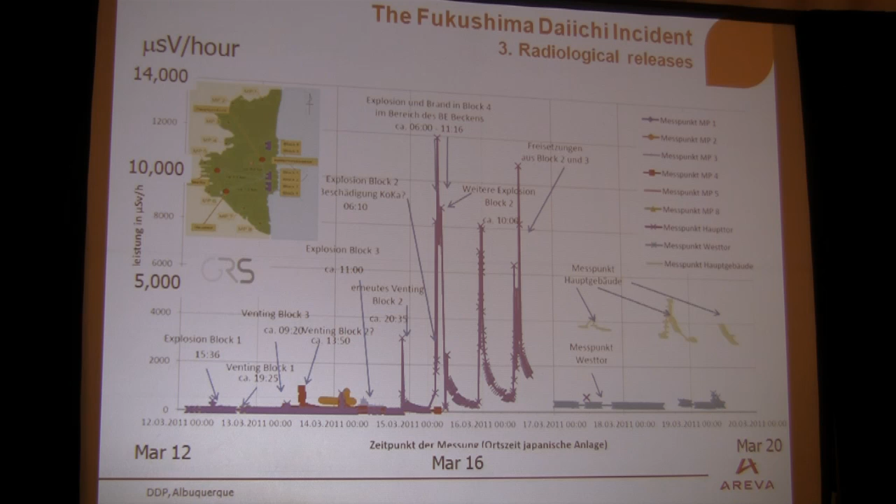Outside the plant site, the fission products were released in steam. In other words, one of the things that can happen in a reactor is you've always got some radioactive inert gases. You're not going to trap those. They simply go up into the atmosphere. They're short-lived and so forth. If you have things like iodine that are released, they go out with the steam.

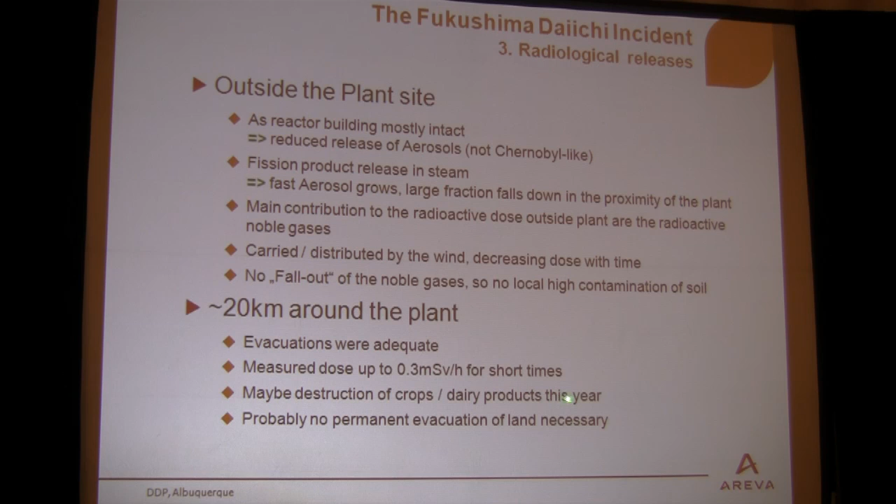So they're carried by the wind wherever they happen to go and so forth. There's no fallout of the noble gases there, but there are some things like the iodine and so forth that were released. Around 20 kilometers, they had adequate evacuation. For short times, they had doses up to 0.3 millisieverts per hour. Perhaps destruction of crops and so forth.

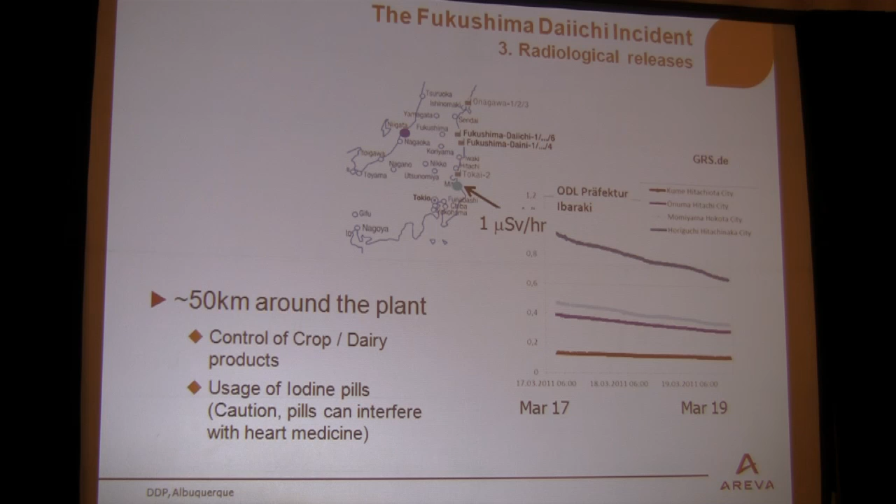Here are some graphs showing the levels. This is 0 up to 1 microsievert, which is 0.1 millirems per hour. This is at Onuma, Hitachi, and a few other cities that are a little bit farther away. And they're sort of concerned around 50 kilometers. Well, that's probably a little bit excessive.

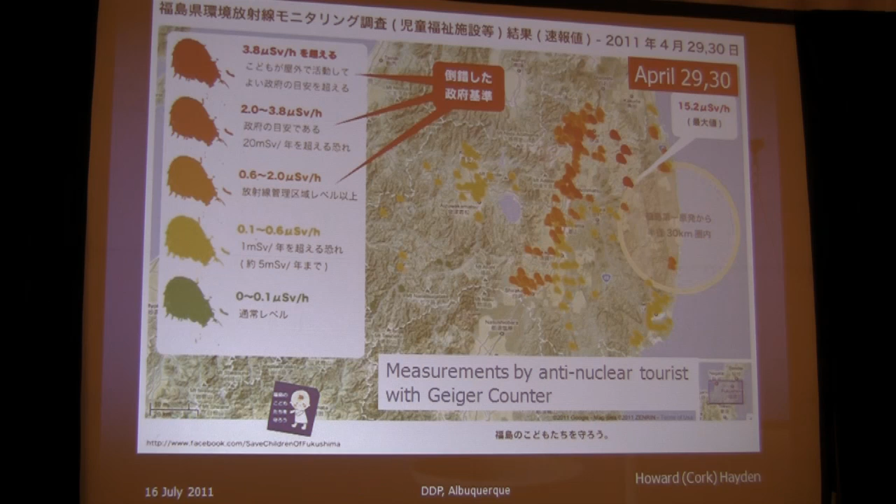Here's another map that this fellow had put together. This one in here is around 520, well, it winds up being 525 millirems per year, which is approximately 2 years' worth if you're at sea level, or 1 year's worth if you live in Denver.

By the way, if I encounter anti-nuclear people in Connecticut or in Colorado who are a little bit afraid of radiation, I politely suggest that they could move to a place where the radiation is a little bit lower. Go to Florida, go to Death Valley, get a job on a nuclear submarine, something like that.

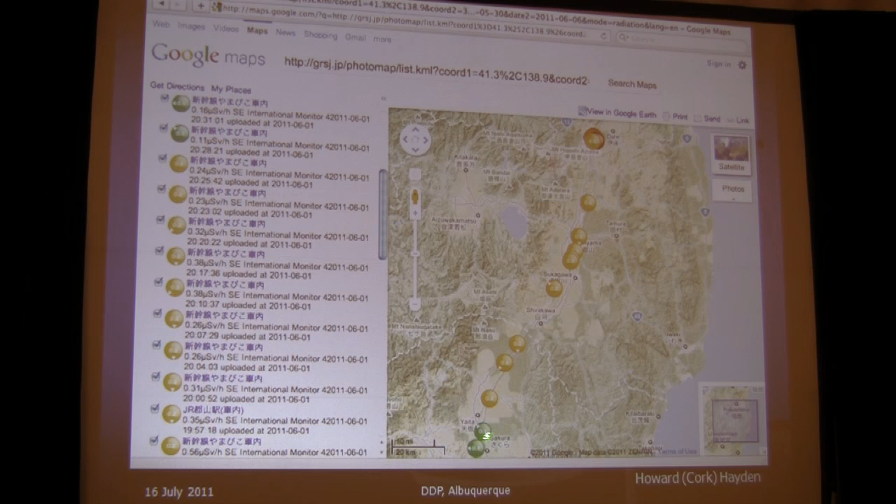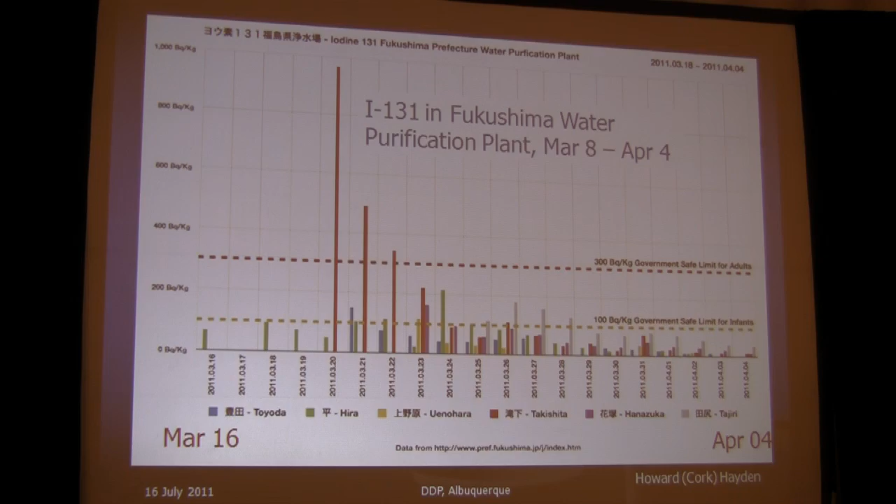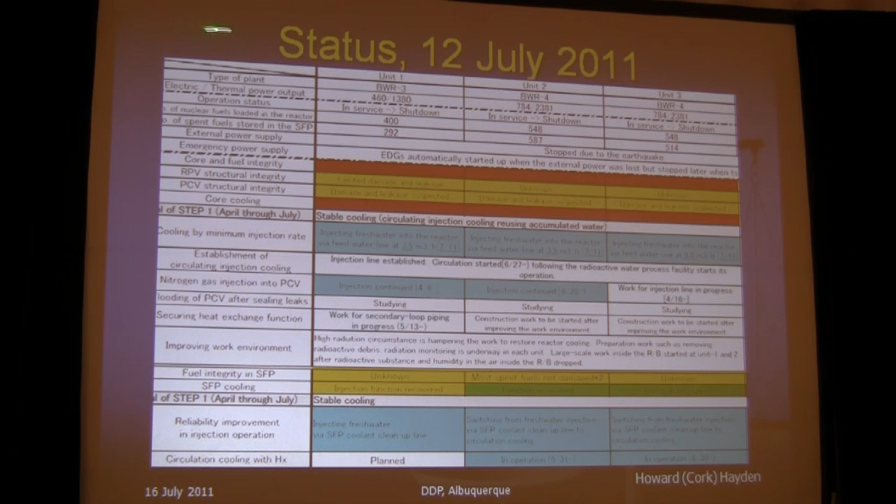Escaped radioactivity of cesium-137 has to come from a damaged core. This is the status as of July 12th. All right, I will get the important things here. Units 1, 2, and 3, the cores are all damaged. The core cooling is not functional, but they're cooling it by freshwater injection and evaporation. Okay? And so they're keeping it cool. So what if they're not using the standard stuff? They're keeping the stuff cool.

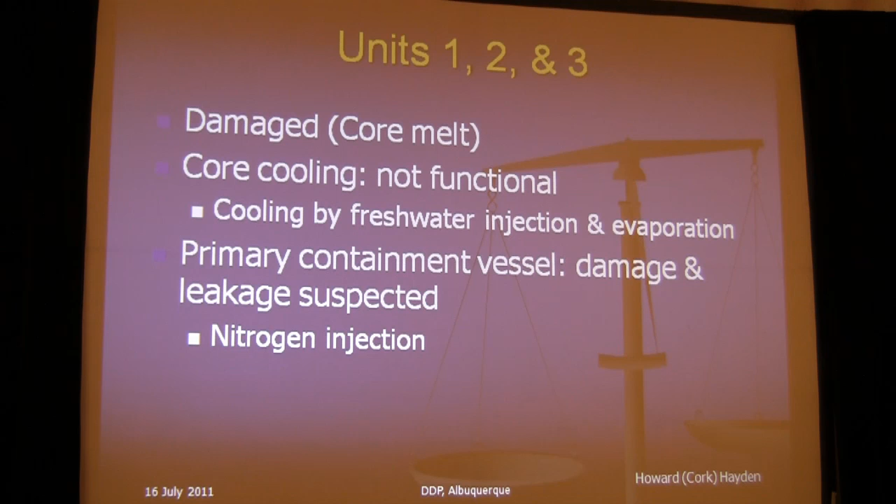The primary containment vessel, they've got some damage and some leakage suspected, and especially in Unit 2, it looked like that wet well was damaged quite a bit. And they're using nitrogen injection to make sure that the hydrogen that could possibly be released doesn't find any oxygen to set a fire off.

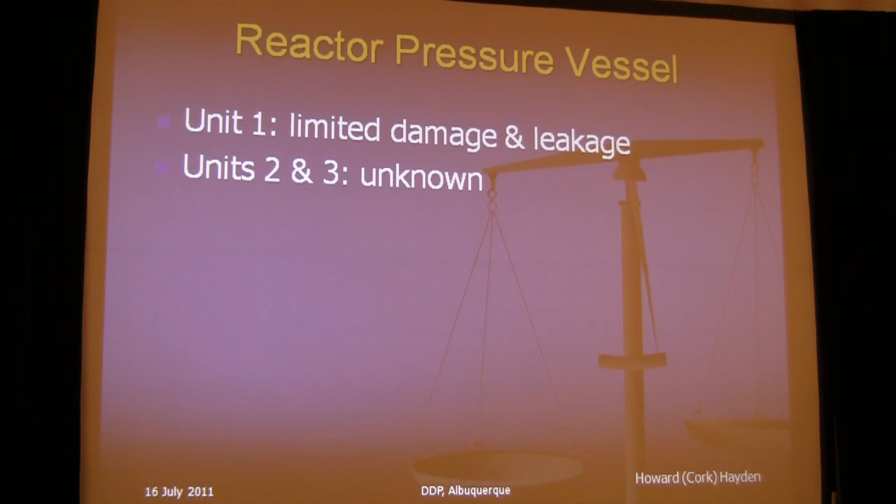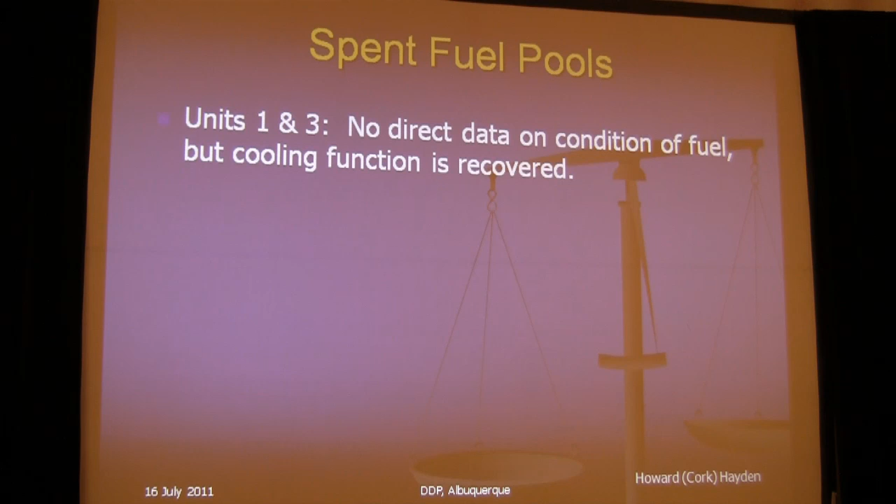The reactor pressure vessel, Unit 1, has limited damage and leakage. They don't really know the condition of Units 2 and 3. They haven't got that information yet. And that data that I had was actually 4 days before I came here. Spent fuel pools, there is no direct data on the condition of the fuel, but the cooling function is working well. The Unit 2, based on isotope analysis, it's mostly not damaged. The cooling function is recovered.

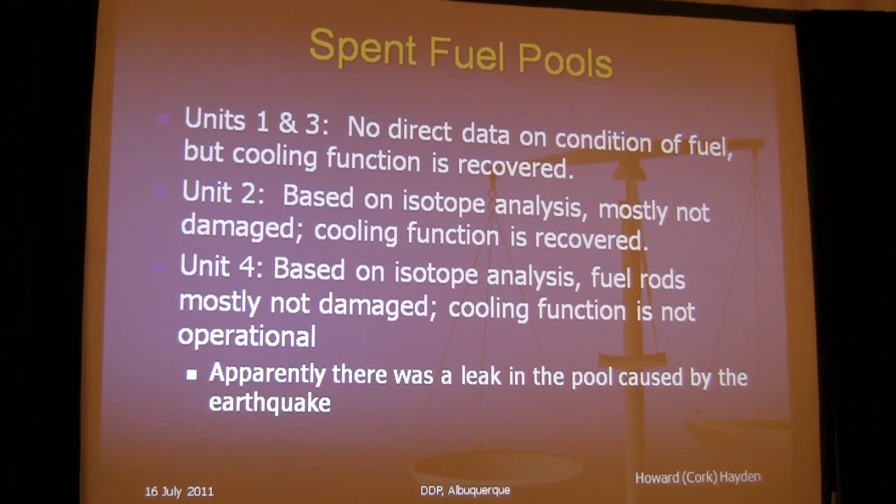Now, Unit 4 was the one that had the freshest fuel in it, and it's mostly not damaged. The cooling function is not operational, but they're feeding water into it. In other words, the pump system that's supposed to work isn't working, so they have another pump pumping water in. There was a leak in the pool, evidently caused by the earthquake. In other words, the temperature in there rose a lot faster than they expected it to because evidently there's some water leakage. And you know what happens when you have the water leakage? It just goes away.

All right, so the future looks like this. It depends on the time frame. Right now, Germany is working on a phase out of nuclear, phase out coal, pay 54 cents a kilowatt hour for solar, and turn around and sell it for 15 cents. That'll work. And the US is still pretty much controlled by anti-nukes. Steven Chu is not really an anti-nuke. He is pro-biomass, like algae are going to solve the problem.

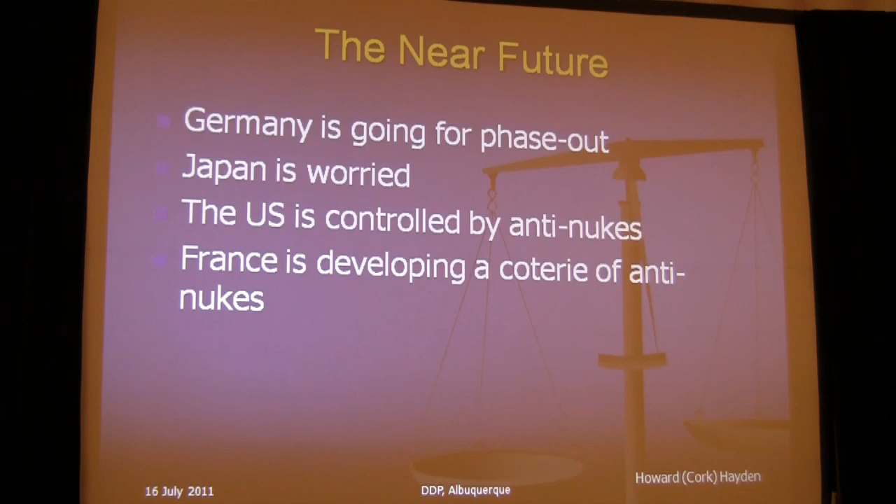And France is actually developing its own coterie of anti-nukes, and that's kind of too bad. Sweden, well, they're a little bit dicey. The reality is going to hit Sweden before too long. And so the immediate future looks like fear is going to dominate and there won't be nukes built for a while. The intermediate future, which means 20, 30, 50 years, something like that, it's a crystal ball, and the reason it's a crystal ball is really the competition. There is plenty of natural gas, there is plenty of coal, and nuclear finds itself in competition with things that are financially pretty sound, okay? More dangerous than nuclear, but financially sound.

In the distant future, it's nukes or freeze in the dark. Because the only competition in the distant future is solar and wind. And it's the lowest quality power on the planet, so it's nukes or freeze in the dark.